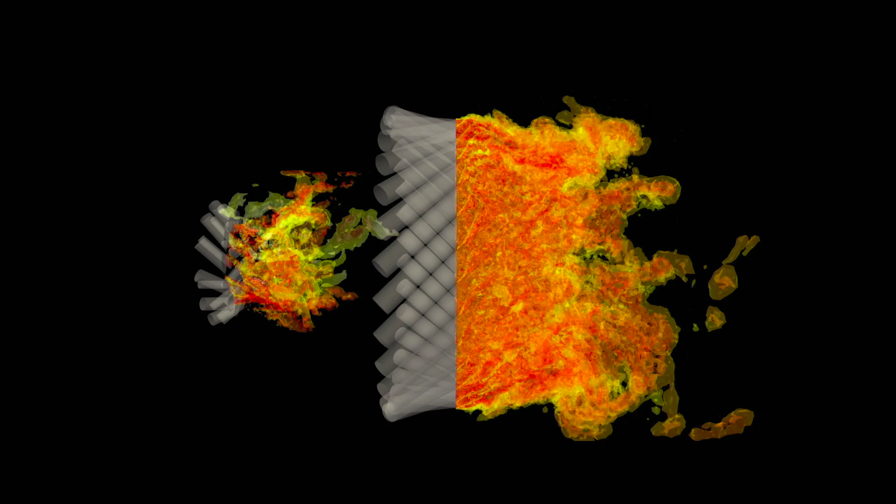Is combustion a technology of the past? This question is legitimate, considering that up to now, combustion has been strongly related to greenhouse gas emissions, especially from the combustion of fossil fuels.

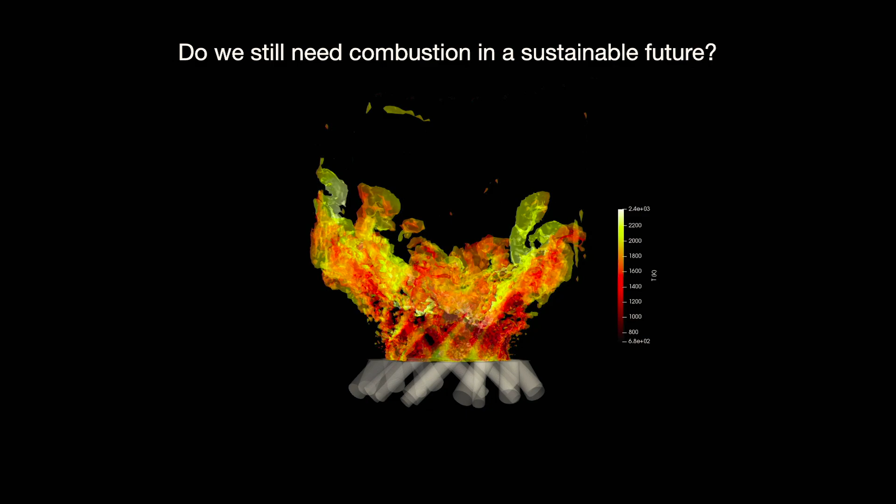In a more quantitative way, these figures show that the temperature has increased by 1.2 Celsius degrees compared to the period before industrialization. This global temperature increase is undoubtedly a consequence of human activities through greenhouse gas emissions coming from the combustion of fossil fuels.

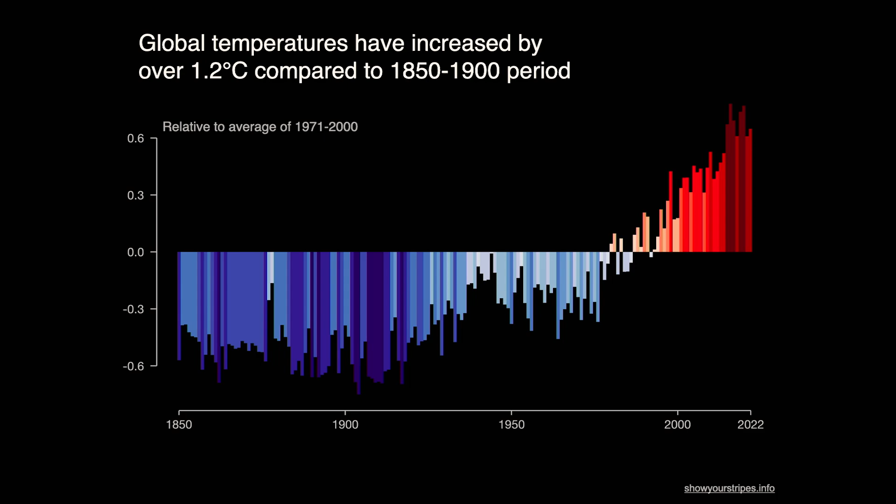It has been shown that this temperature increase is strongly correlated to CO2 emissions, where every ton of CO2 rejected in the atmosphere adds to global warming. And this must be stopped if we want to keep the temperature increase below 2 Celsius degrees.

Hello, my name is Alessio Pappa. I'm a postdoctoral researcher at the University of Mons, and I'm going to talk about my research topic during my PhD thesis and to talk about combustion flexibility.

So far, combustion has been and still is essential to transport us, fuel our industry, make our electricity or warm our houses. Nevertheless, more sustainable approaches must be considered, even though renewable energies come with several limitations.

We can point out the intermittent behavior of renewable energy sources, like solar and wind, or also that some industry-related sectors are challenging to electrify towards decarbonization. Hence, even in a fully sustainable net-zero carbon economy, combustion will have a major role to play.

But to reach clean and sustained energy generation, combustion must become more flexible, especially in terms of fuel and operation. Let's see together what this word means and why we are talking about flexibility.

As you can see, I'm standing near a micro gas turbine that is able to produce up to 100 kilowatts of electricity. Actually, this is the micro gas turbine that I use for most of my numerical investigation.

There are several components in a micro gas turbine, such as the compressor to compress the air, heat exchanger for the heat production, the turbine for the electrical production, but for the thesis we are mainly focusing on the combustion chamber that is just here. These small-scale units can produce both heat and electricity, but obviously it also emits CO2 when running on natural gas.

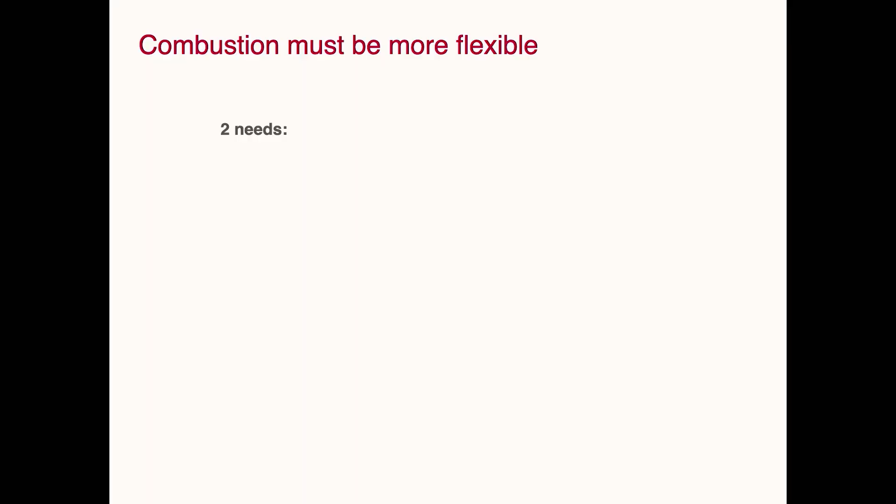But let's get into it. So, we identified two different needs: the need for operational flexibility with the implementation of advanced cycle modifications, such as humidification or EGR, modifying the oxidizer composition, and then the need for fuel flexibility with the necessity to burn various electrofuels, such as hydrogen.

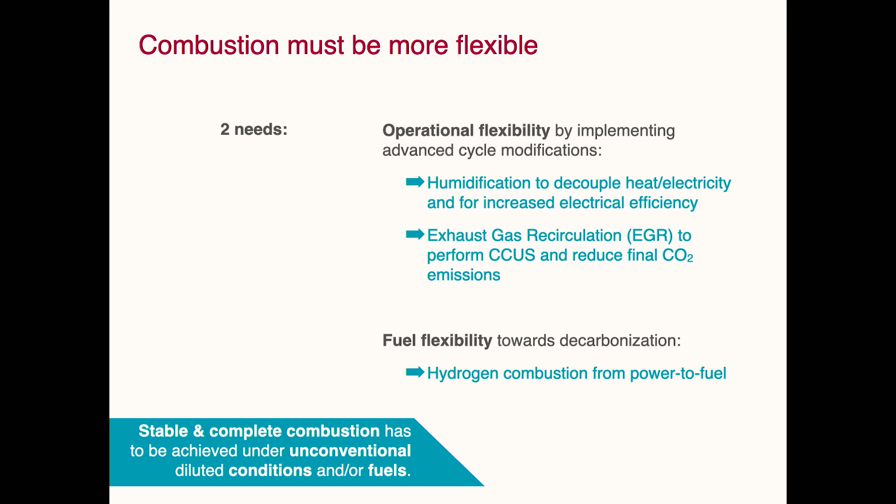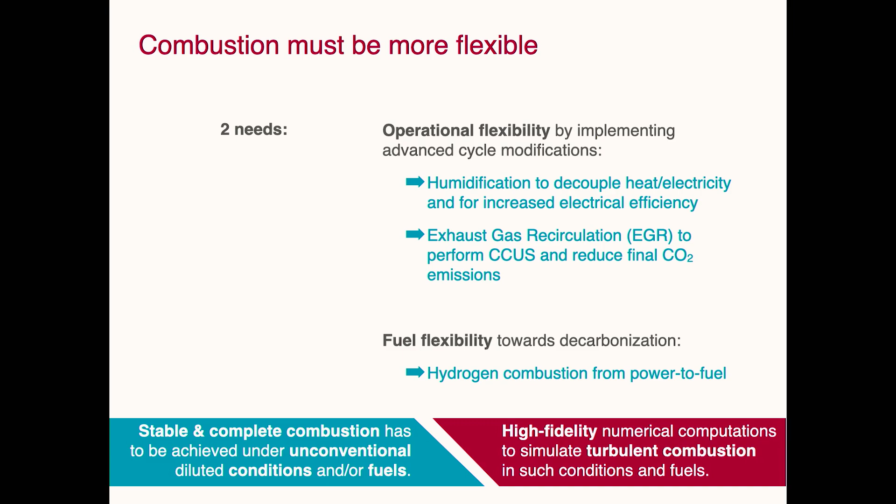Therefore, these unconventional diluted conditions or unconventional fuels can alter the performance and the stability of the combustion. Therefore, the objective with this thesis is to provide accurate data for real industrial-like burners on the combustion stability, performances, and emissions. To answer this need for flexibility, the research scope of my thesis was using high-fidelity simulation to assess...

...and analyze the impact of unconventional diluted conditions such as water and EGR and/or various fuel or fuel blends on the combustion stability, performance and emissions, especially for micro gas turbine combustors.

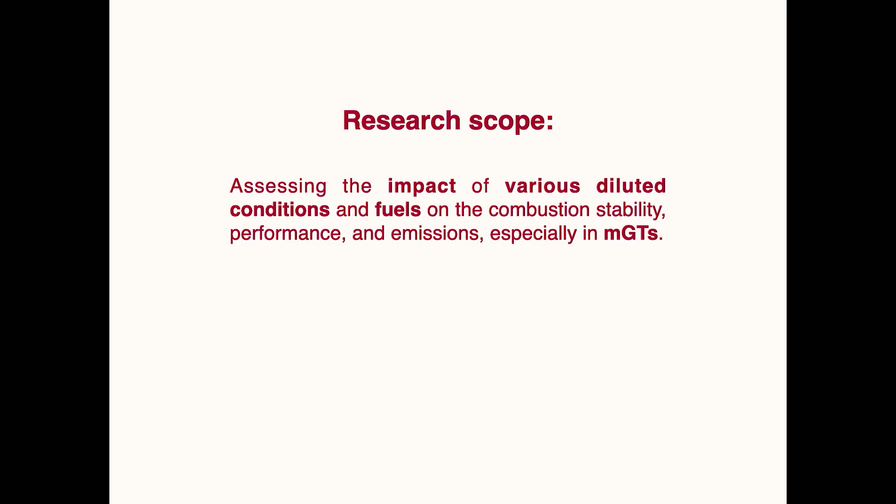To achieve this research goal, the contribution of this thesis was built on three main axes: the numerical tool development, the operational flexibility, and the fuel flexibility. Let's start with the numerical tool development.

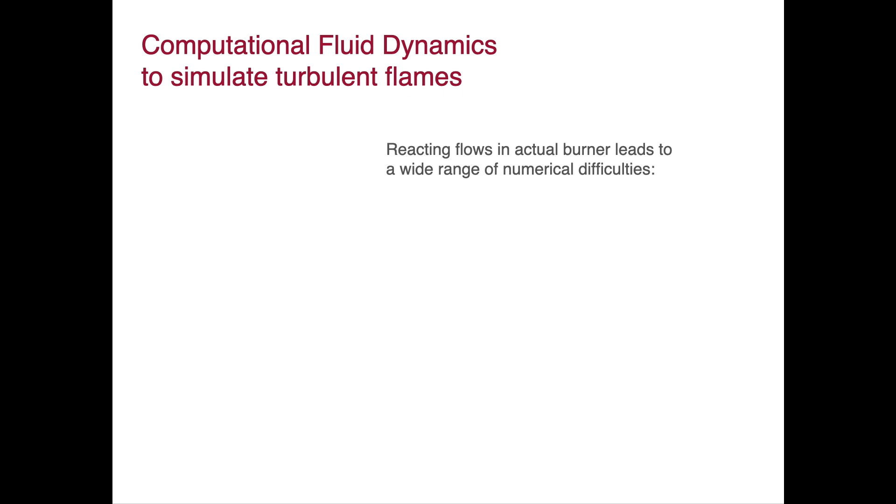In the field of numerical simulations, predicting reacting flow behaviors in actual burners leads to a wide range of numerical difficulties when using computational fluid dynamics. First, gas turbine burners involve complex geometries with a high level of turbulence. There are also all the transfer mechanisms such as heat and mass transfer, and finally the turbulence-chemistry interaction.

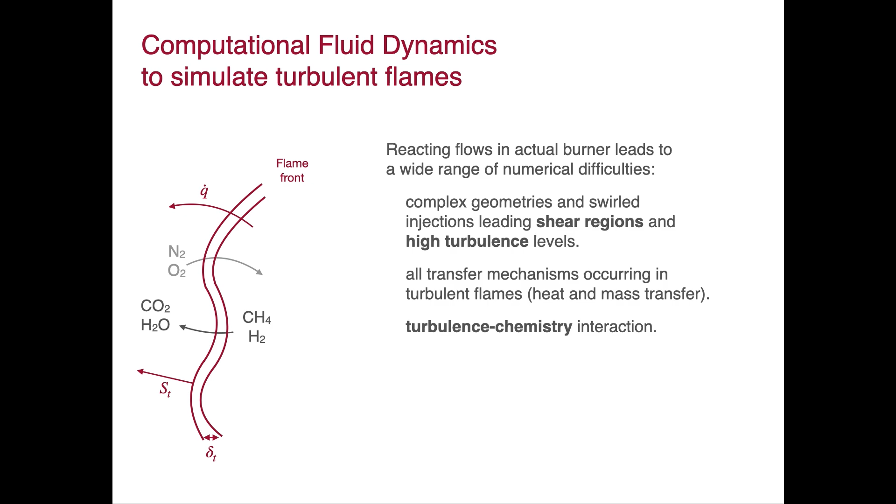To deal with these difficulties, different models can be used for turbulence modeling and chemistry modeling. For turbulence modeling, I worked with large eddy simulations. This approach offers a balanced solution between fidelity and complexity.

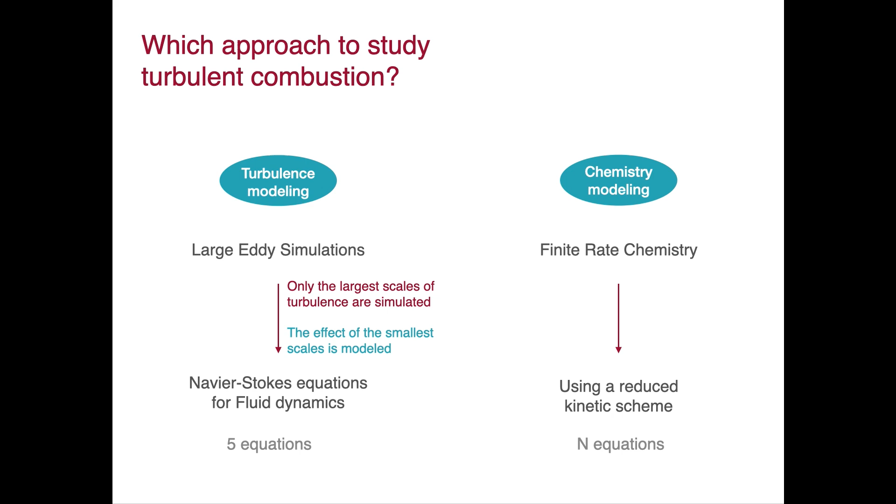In addition, this approach combined with a finite rate chemistry approach, also called complex chemistry, allows assessing combustion instabilities, especially under the unconventional conditions and fuels we want to consider for this thesis.

Regarding the meshes used for my simulations, I had the opportunity to work on the development of adaptive mesh refinement for combustion applications. This video shows that the adaptive mesh refinement algorithm dynamically refines the mesh all along the flow simulation, where the mesh refinements follow the flame shape evolution and any flame fluctuations.

This implementation of the algorithm allows optimizing the cell distributions on the domain. It also reduces the human effort during the meshing phase of a CFD project.

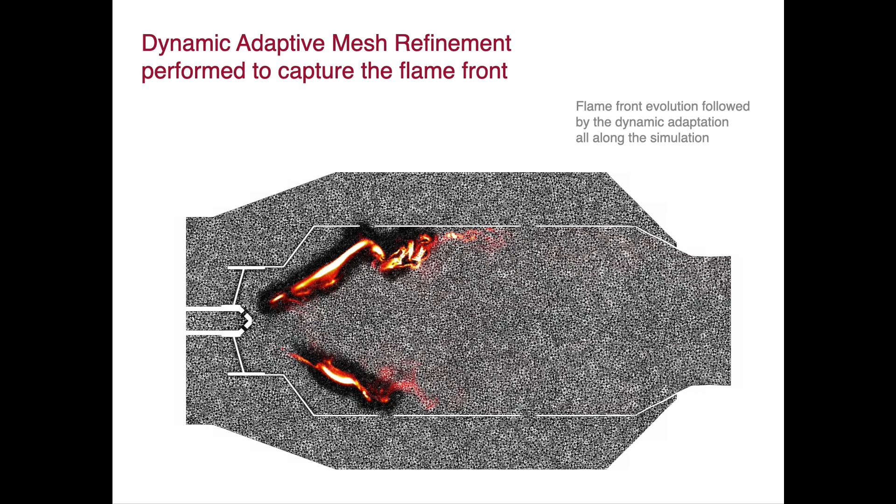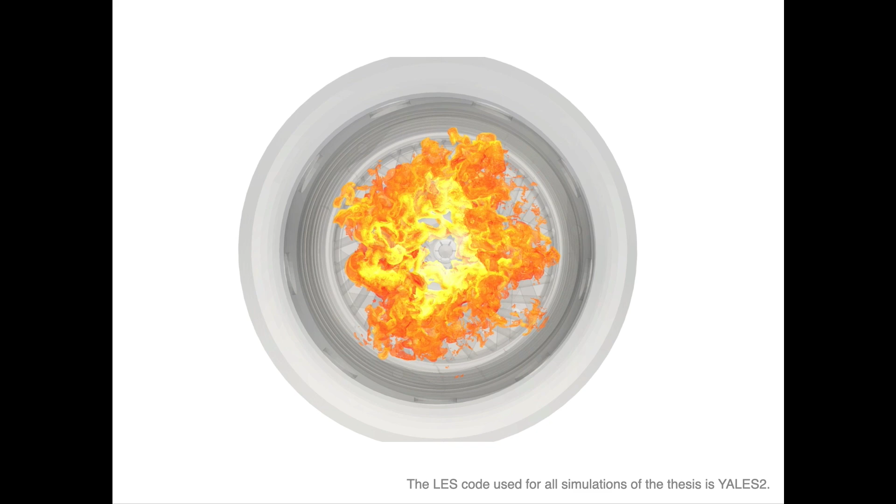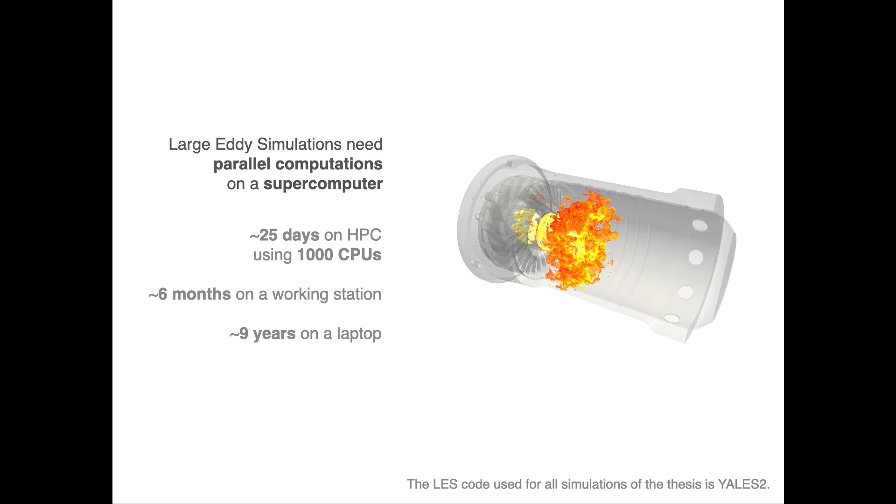Finally, any flame stability analysis requires high-fidelity computations, such as large eddy simulations, but the computational cost can quickly increase with the configuration and the required accuracy for turbulence and chemistry. For example, LES running on a supercomputer requires, on average, 25 days on high-performance computing using 1000 CPUs. This corresponds to 6 months on a workstation and 9 years on a simple laptop.

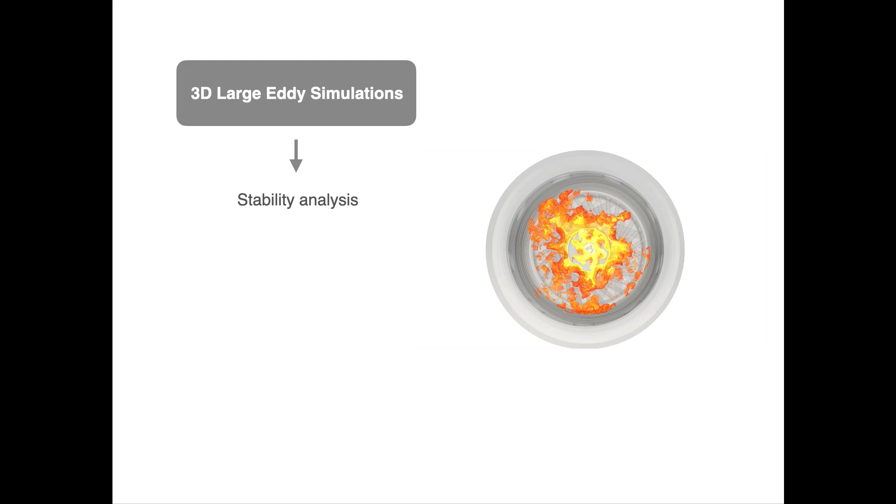Therefore, during my thesis, I also developed a hybrid 0D-1D model coupling chemical reactor networks with 1D flame calculations, allowing low-cost predictions of any combustor performances and emissions using a simple Python code.

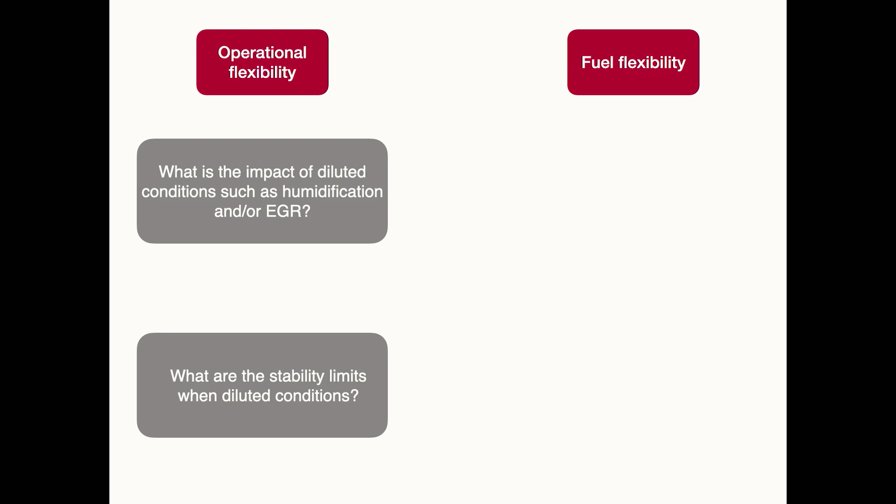The numerical results obtained during the PhD thesis were made to answer several questions. First, for the operational flexibility, we can wonder what is the impact of diluted conditions, such as humidification and EGR, on the flame. Then we can wonder what are the stability limits when performing diluted conditions, so how far we can push the dilution. And for the fuel flexibility, we can wonder if it's possible to safely burn hydrogen without any combustor redesign.

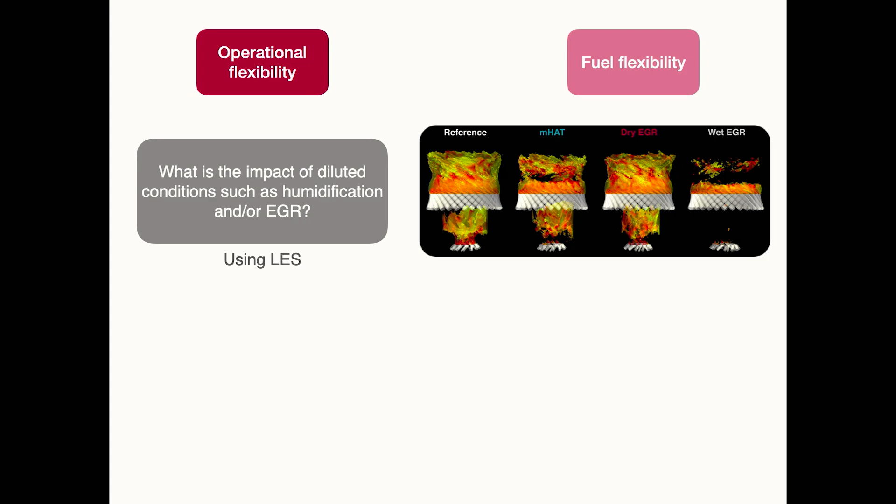For the first question, we performed large eddy simulation to assess the impact of moderate dilution level of water injection, EGR, and combination of both. Regarding the stability limit, by using the simplified 0D-1D model, we were able to define the range of stability between blow-off and flashback to know in which operating conditions we can keep stable combustion.

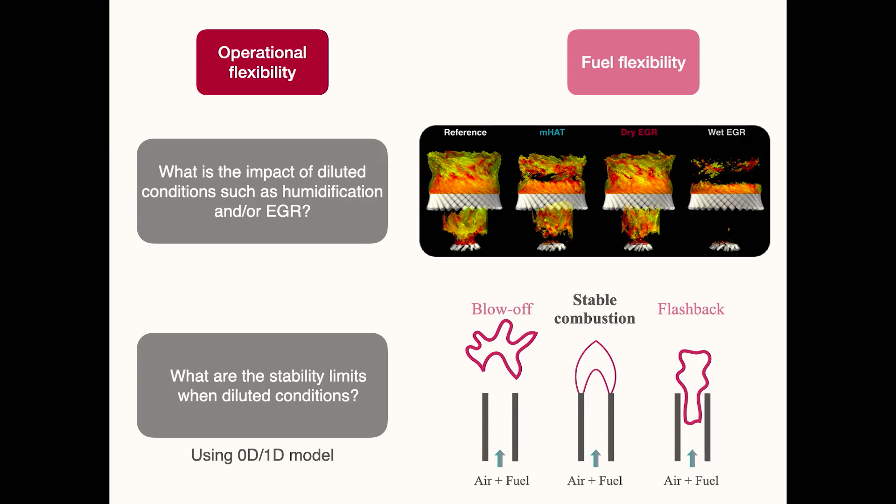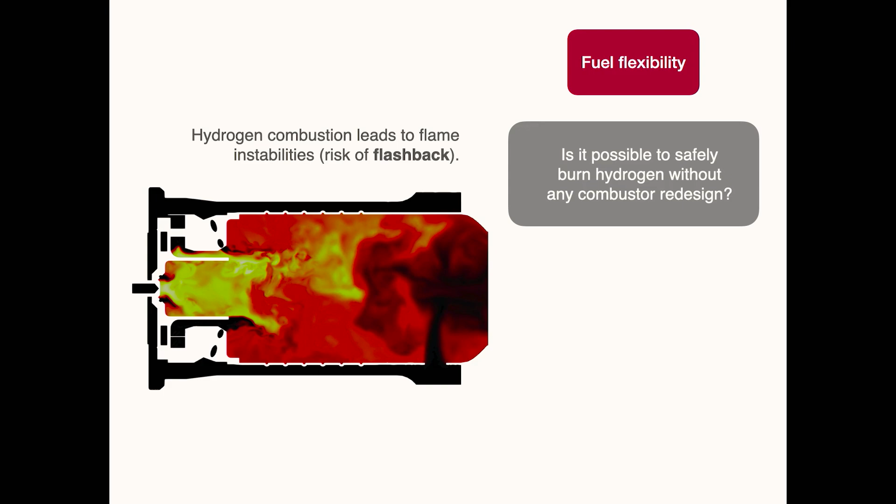For the last part, all the observations, conclusions, and developed numerical tools helped to work on hydrogen combustion. Indeed, hydrogen combustion is well known to lead to flame instabilities with risk of flashback apparition.

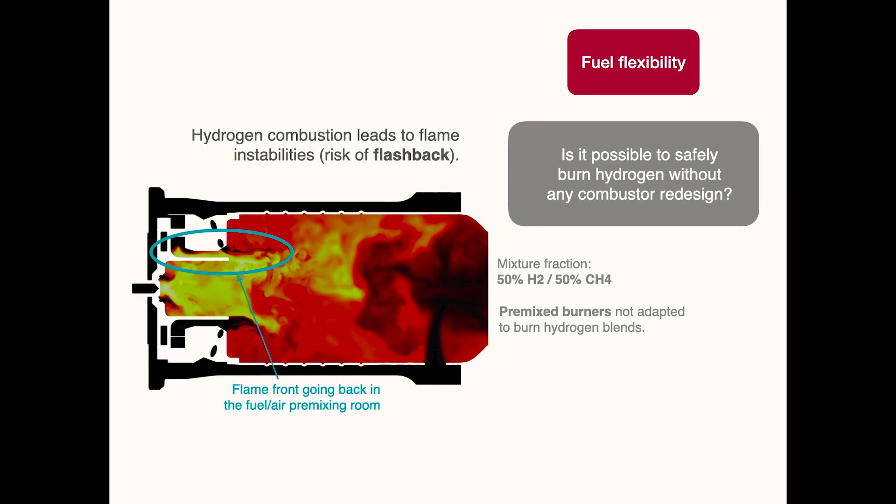Here we have an illustration of results of a mixture fraction of 50% hydrogen and 50% methane, where we can see that premix burners are not adapted to burn hydrogen blends, with a flame front going back through the injectors. This can lead to critical damages to the facilities.

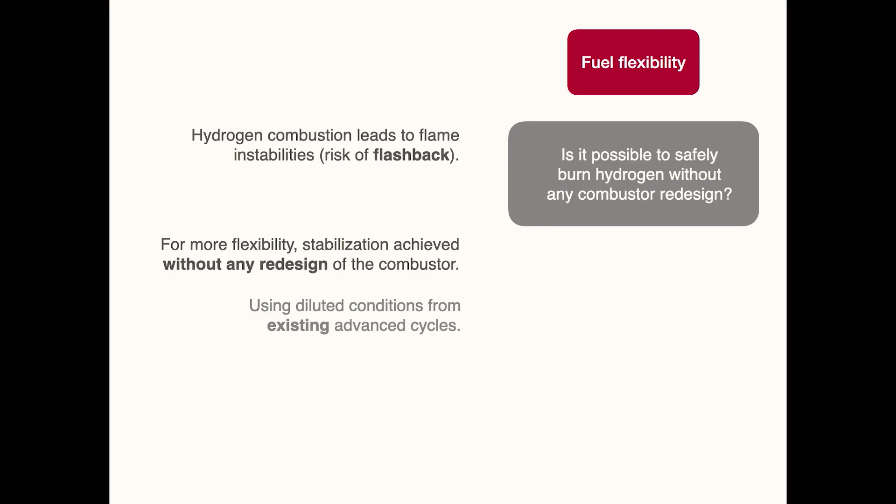Literature provides several solutions to avoid such flashback issues, but most of them require modifying the combustor geometry. But for more flexibility, stabilization must be achieved without any redesign of the combustor. So the idea provided by this thesis is to use diluted conditions from existing advanced cycles, such as humidification and EGR, to slow down the reaction rate, temperature, and flame speed.

So the main goal of this part was to work on flashback prevention for various hydrogen blends without any redesign of a microgas turbine combustor. This work is split in two parts: first, using the 0D-1D model for fast prediction of the operating conditions to avoid flashback, and then 3D LES for the stability analysis.

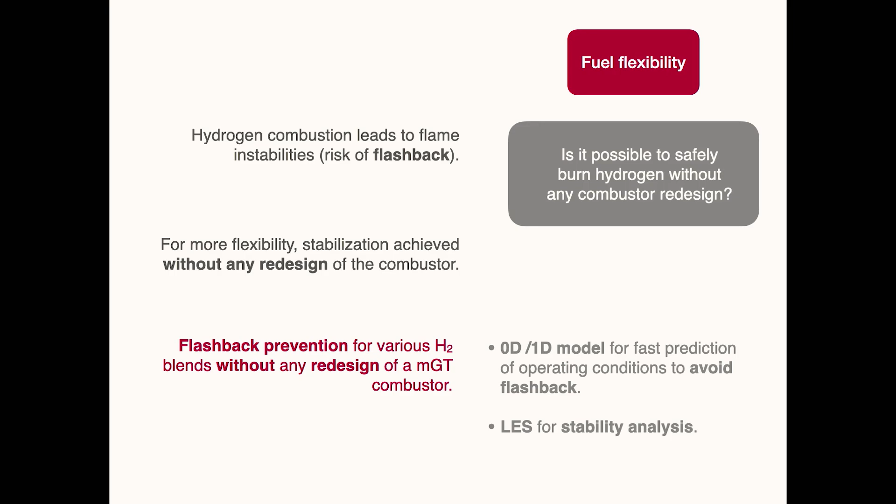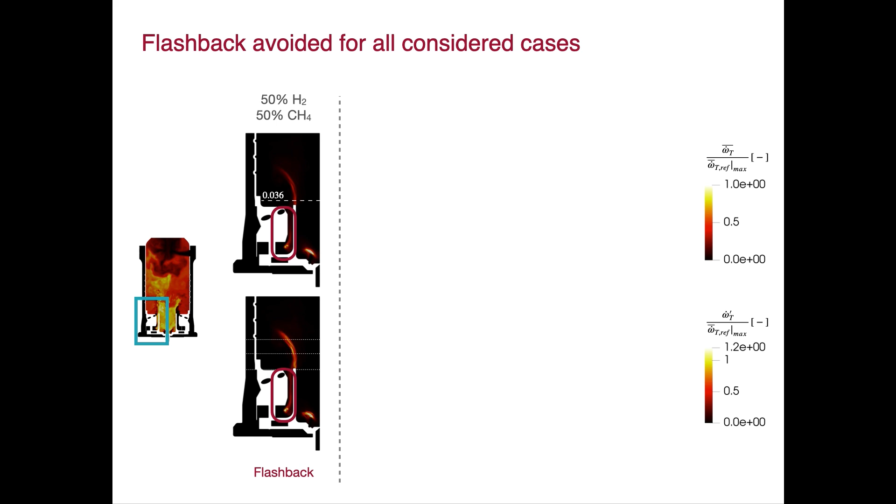Let's see now if the predetermined dilution levels allow avoiding flashback. I already showed that flashback occurs for a mixture fraction with 50% hydrogen. Here are the LES results of the time average and fluctuations of the reaction rate, where only the region near the injectors is shown.

First, with the same mixture fraction, by applying humidification and EGR, we can see that flashback is avoided. Then, the results show that we are able to burn up to 100% hydrogen without any flashback when performing humidification, but not with EGR. Therefore, the LES results show that the proposed methodology allows avoiding flashback without any combustor redesign.

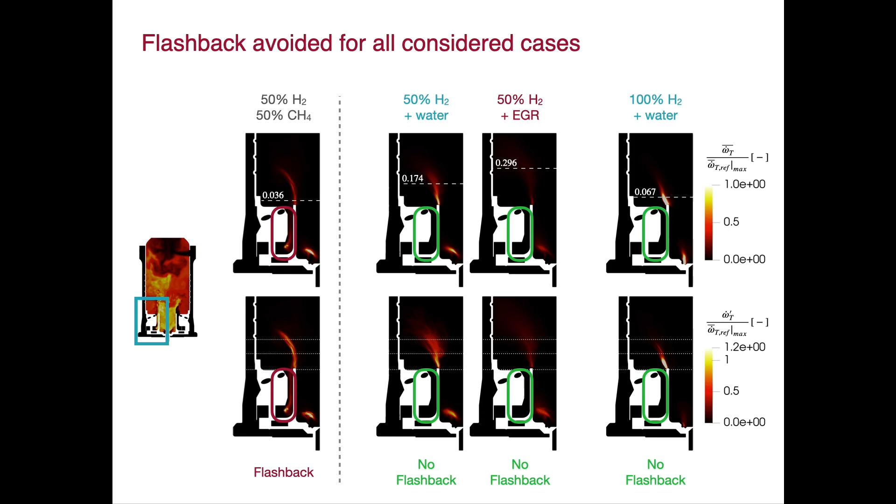Let's summarize this work in a few highlights. The strength of this thesis lies in the development of models using large eddy simulations combined with complex chemistry to simulate turbulent combustion in actual microgas turbine combustor geometries.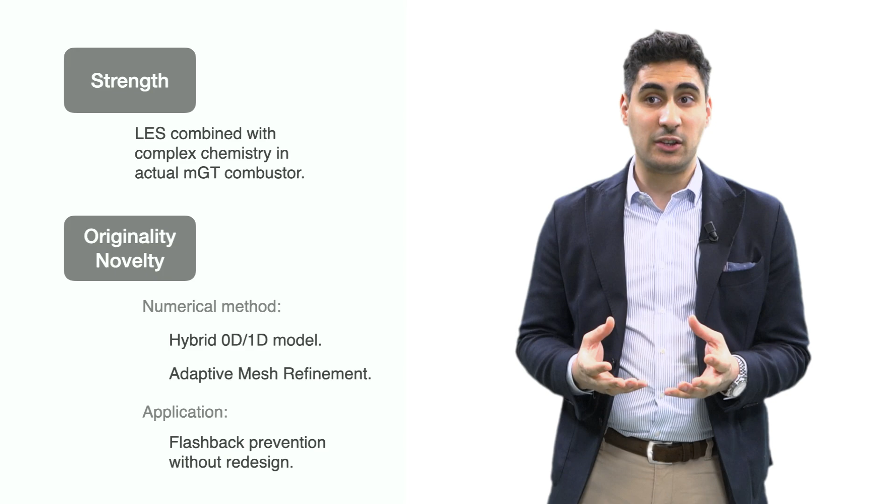Regarding the originality and novelty provided by this thesis, first on the numerical method part, I had the opportunity to develop a hybrid 0D-1D model for fast prediction, and to develop adaptive mesh refinement adapted to combustion applications. On a more application part, I had the opportunity to work on flashback prevention without any redesign of a microgas turbine combustor.

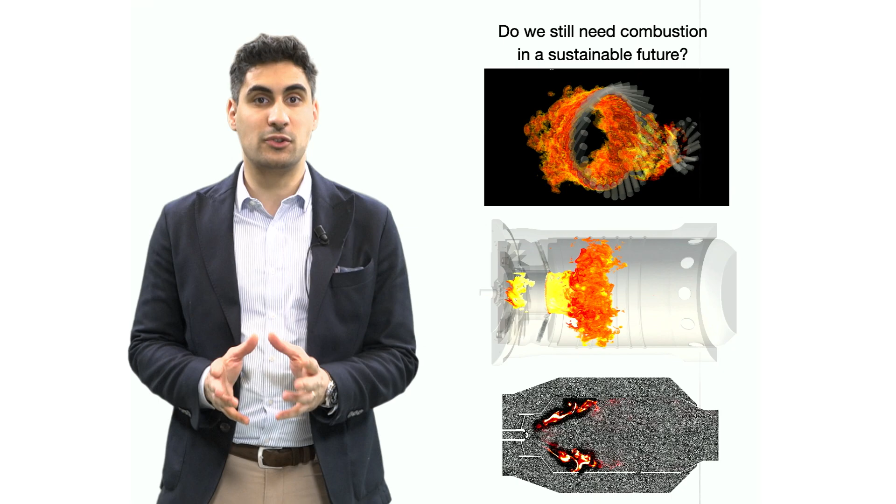So, do we still need combustion in a sustainable future? I believe we do. By becoming more flexible, combustion has a major role to play, first in the energy transition, and then in reaching a fully sustainable net zero carbon economy.

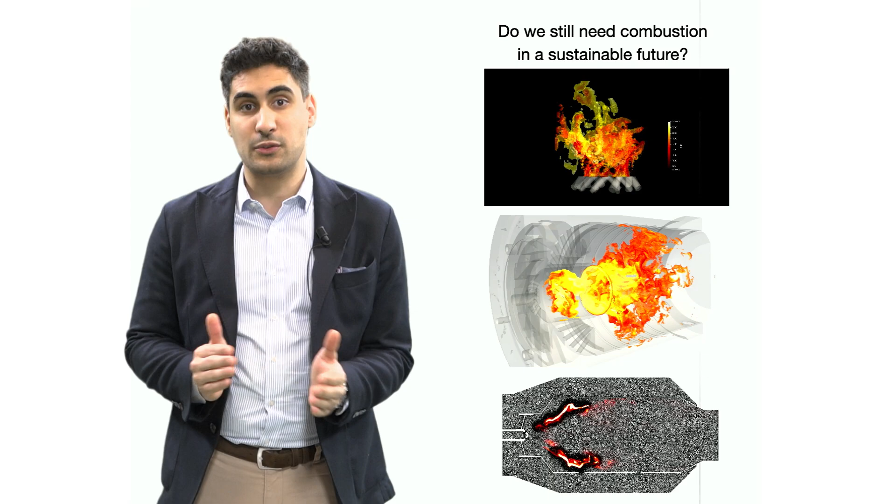This thesis brings some insight and different paths using both fast prediction numerical tools and high-fidelity simulation to push further the flexibility of combustion processes, especially by bringing important contribution in the field of microgas turbines.